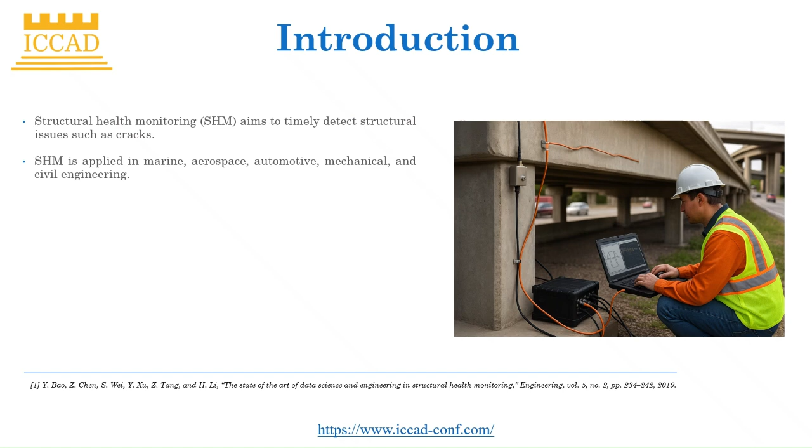We will start with the introduction. Structural health monitoring aims to timely detect structural issues such as cracks. It is applied in marine, aerospace, automotive, mechanical, and civil engineering.

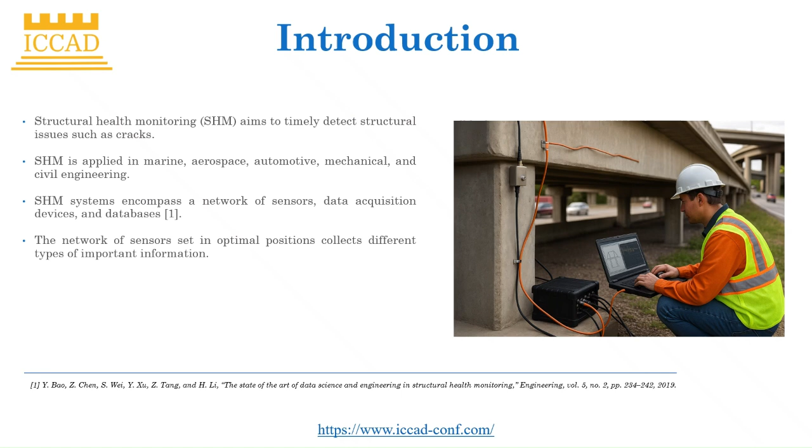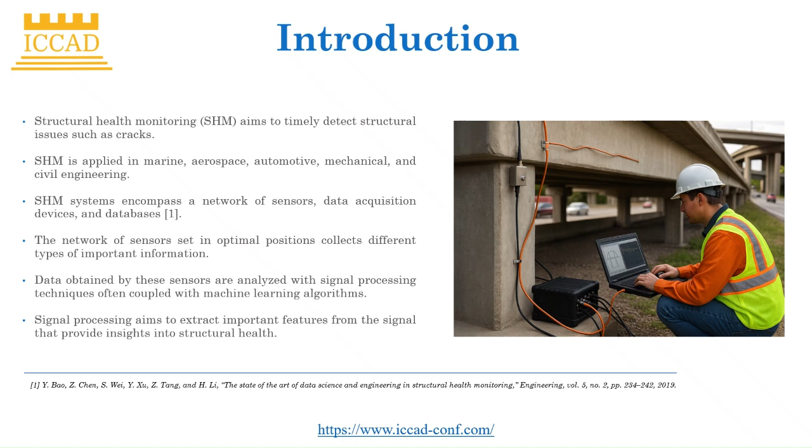Structural health monitoring systems encompass a network of sensors, data acquisition devices, and databases. The network of sensors is set in optimal positions to collect different types of important information. Data obtained by these sensors are analyzed with signal processing techniques, often coupled with machine learning algorithms. Signal processing aims to extract important features from the signals that provide insights into structural health.

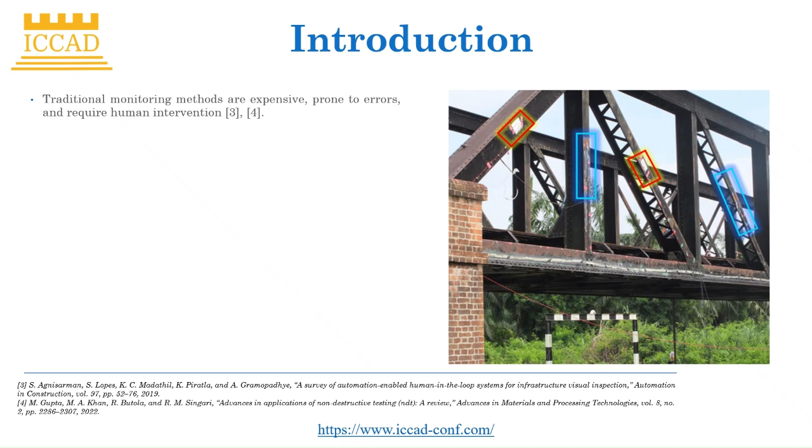Traditional monitoring methods are expensive, prone to errors, and require human intervention. The development of sensing technologies has led to the use of advanced distributed sensor networks for automated monitoring.

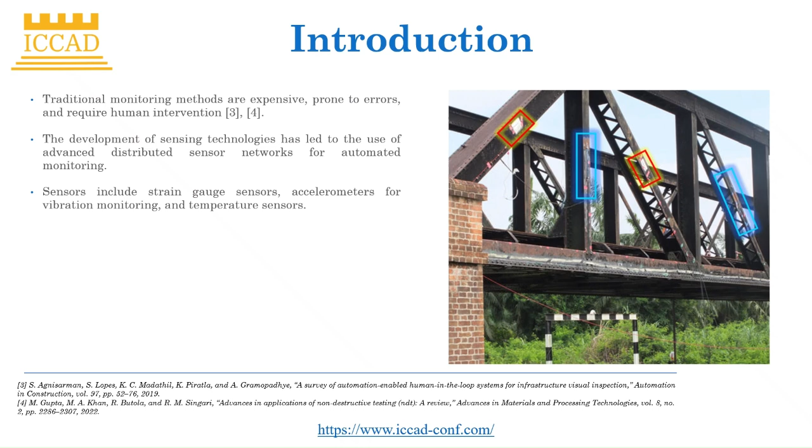Sensors include strain gauge sensors, accelerometers for vibration monitoring, and temperature sensors. These sensors track structural responses to external loads, environmental conditions, and operational factors.

Real-time data analytics relying on signal processing and machine learning allows optimal predictive maintenance strategies. The efficiency of sensing and processing has improved with the development of wireless sensor networks and IoT platforms.

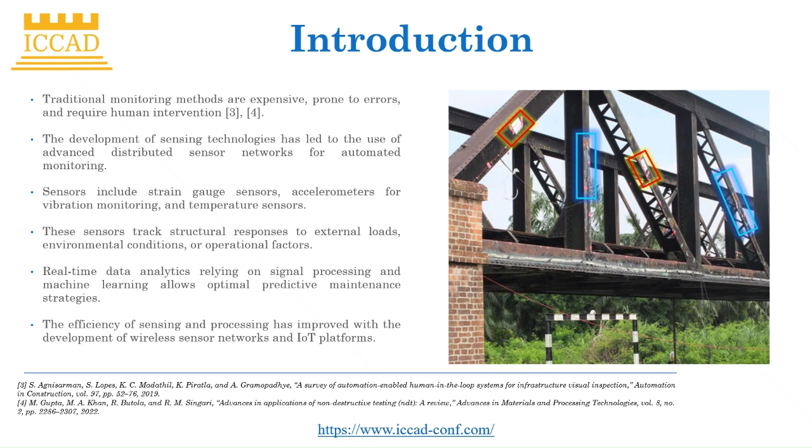Crack detection is vital in marine engineering to ensure the safety and durability of ship structures. The hull must remain watertight to protect cargo, machinery, and accommodation areas.

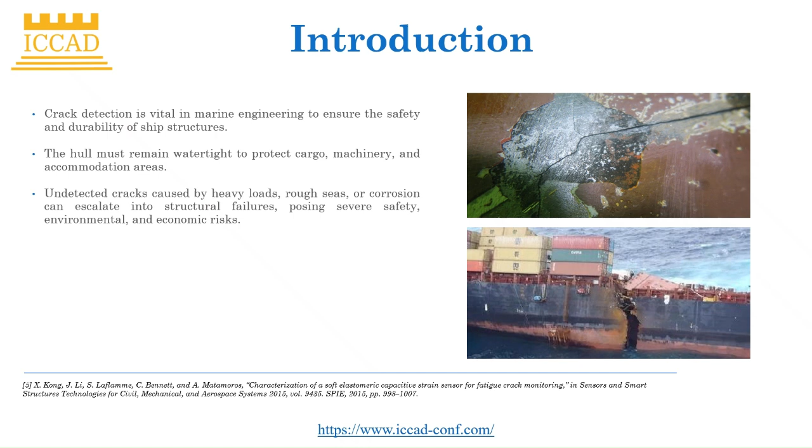Undetected cracks caused by heavy loads, rough seas, or corrosion can escalate into structural failures, posing severe safety, environmental, and economic risks.

Advanced structural health monitoring techniques enable early detection of defects, preventing catastrophic accidents, extending vessel lifespan, reducing maintenance costs, and enhancing overall safety for cargo and crew.

Strain sensors are suitable for monitoring cracks by deploying it over fatigue-prone areas to detect abrupt strain changes due to cracking.

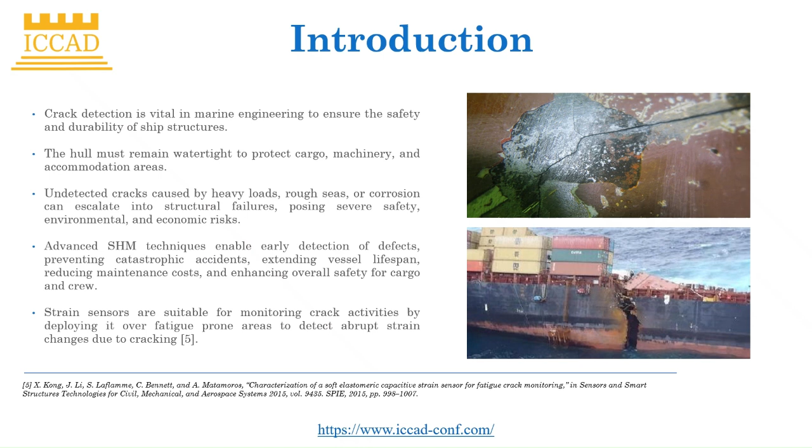Examples of sensors used are accelerometers, strain sensors, ultrasonic sensors, acoustic emission sensors, linear voltage differential transducers, fiber optic sensors, load cells, corrosion sensors, and visual inspection devices.

Sensors are connected to form a network to give a holistic view of structural health. Information collected include acceleration, strain, velocity, and displacement. The aim is to detect and locate damage, such as cracks.

Structural health monitoring techniques are categorized into local, limited to the sensor's area, and global, capable of detecting damage through the structure via sensor networks.

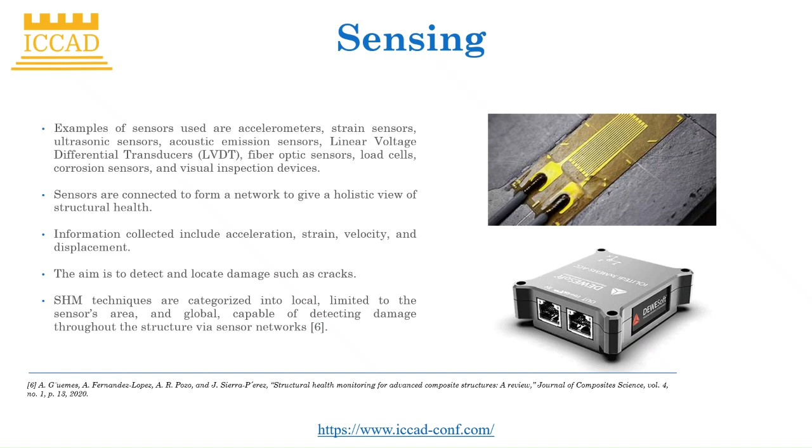Types of recorded parameters include load parameters. They delve into the forces acting upon the structure, encompassing static and dynamic forces such as wind speeds and loads. Global load response delineates the structure's reaction to a given load, measurable across the entire structure, typically encompassing parameters like acceleration and velocity.

Local load response focuses on a specific part of the structure, measuring parameters such as strain, cracks, and tension forces in response to a given load.

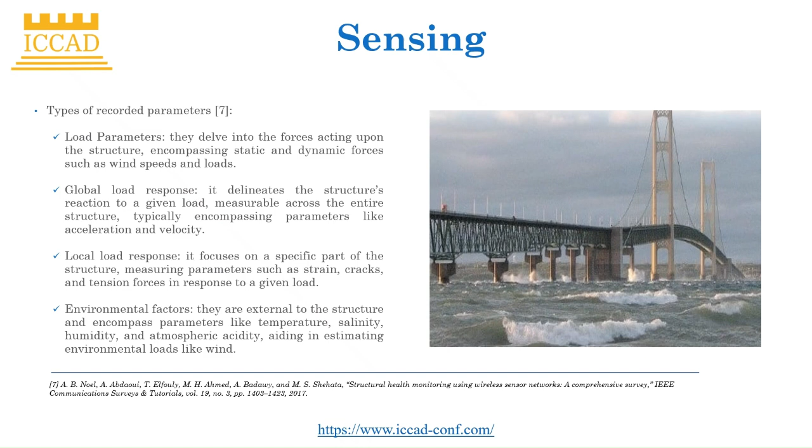Environmental factors are external to the structure and encompass parameters like temperature, salinity, humidity, and atmospheric acidity, aiding in estimating environmental loads like wind.

Sensing data must be collected over a sufficient period at an appropriate sampling rate. The strategic positioning of sensors at various locations is important to capture the structural response. To optimize the placement of sensors in a network, engineering requirements and design considerations must be both balanced.

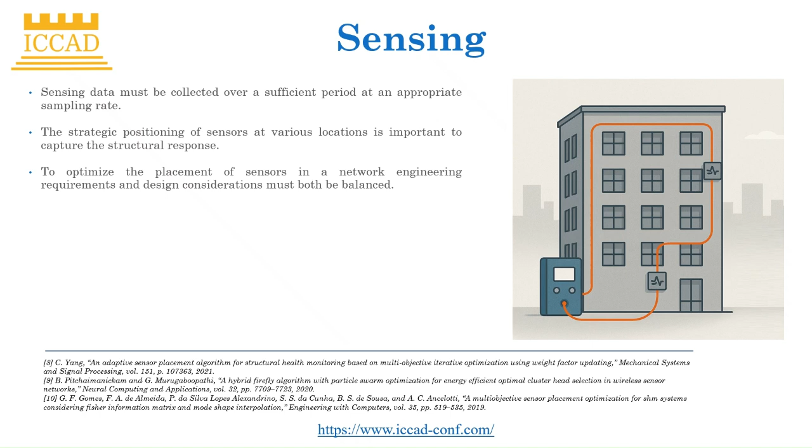Sensors placement problem is complex, requiring heuristics and optimization algorithms. Algorithms aiming to solve this problem include effective independence method, hybrid Firefly, and genetic algorithms.

An important sensor in a structural health monitoring system is the accelerometer. It provides real-time data detecting vibration and movement, aiding in the identification of cracks, shifts, and other stress-related damages.

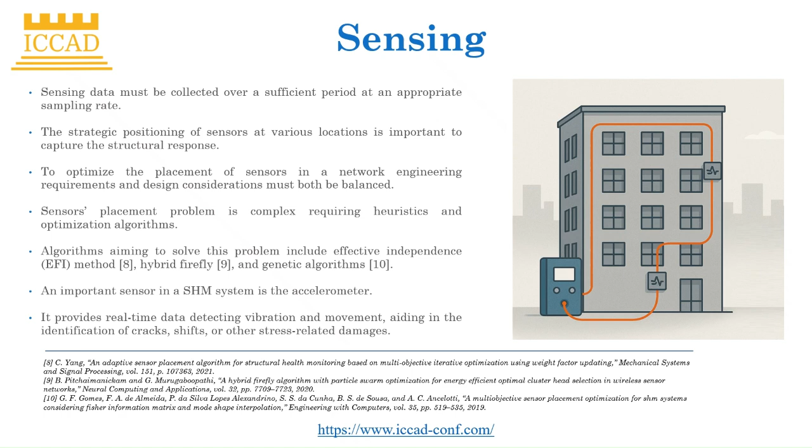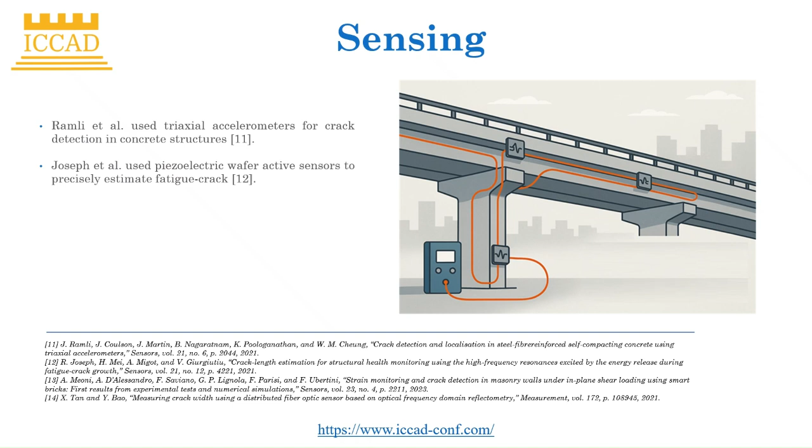There are a lot of examples regarding sensing and structural health monitoring. Ramli et al. used triaxial accelerometers for crack detection in concrete structures. Joseph et al. used piezoelectric wafer active sensors to precisely estimate fatigue crack.

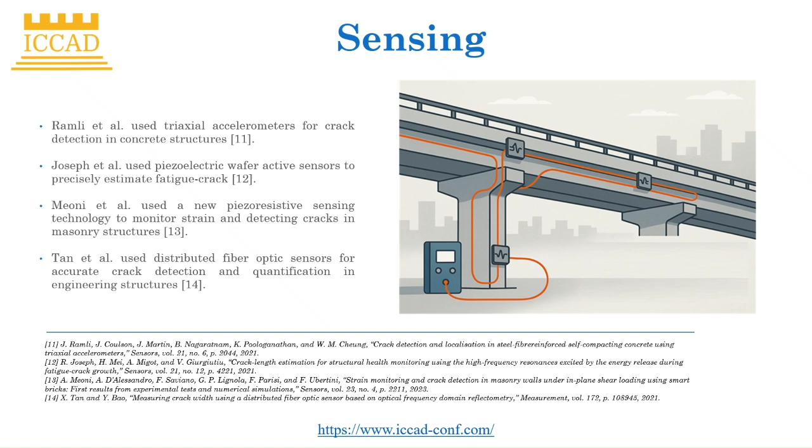Meoni et al. used a new piezoresistive sensing technology to monitor strain and detecting cracks in masonry structures. Tan et al. used distributed fiber optic sensors for accurate crack detection and quantification in engineering structures.

Time-based signal processing techniques: signals collected are used to create mathematical models and extract structural dynamics. Time series analysis is extensively used for extracting features from time domain data, where parameters or residuals of autoregressive models serve as frequent indicators of structural damage.

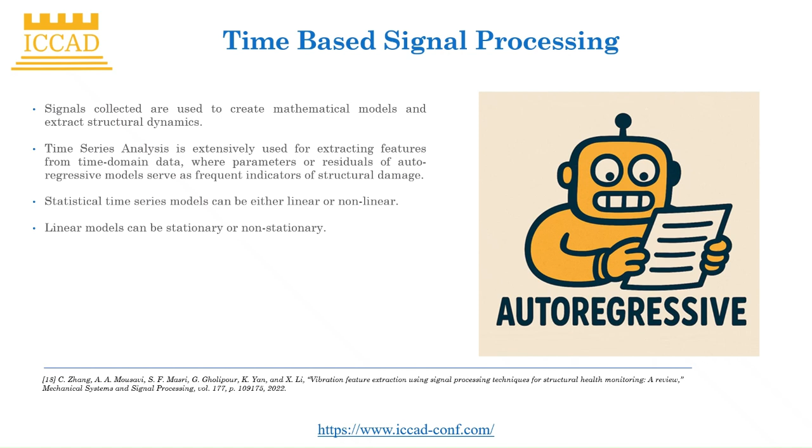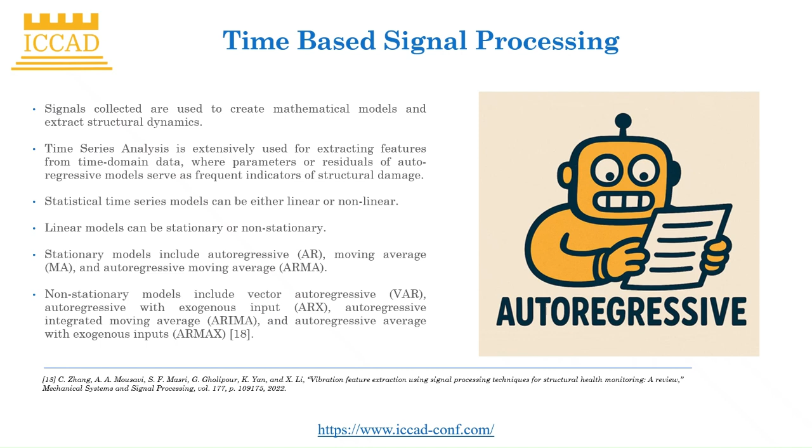Statistical time series models can be either linear or nonlinear. Linear models can be stationary or non-stationary. Stationary models include autoregressive, moving average, and autoregressive moving average. Non-stationary models include vector autoregressive, autoregressive with exogenous input, autoregressive integrated moving average, and autoregressive average with exogenous input.

Some examples: Chegeni et al. developed a method for structural damage detection using Kullback similarity and improved autoregressive modeling, focusing on identifying damage location and severity through vibration data analysis.

Rajeev et al. introduced a novel approach for detecting damage in reinforced beam column joints using adaptive autoregressive modeling.

Anastasia et al. developed an approach using autoregressive modeling to continuously extract damage-sensitive features from strain data collected on railway bridges.

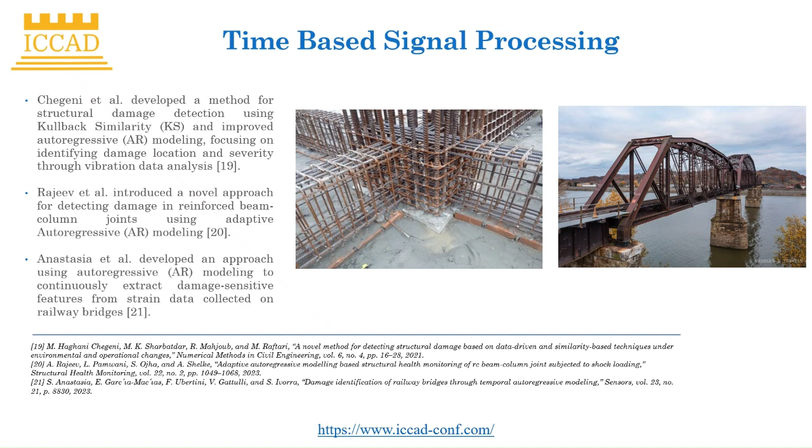Guo et al. utilized vector autoregressive modeling and Bayesian inference to detect structural damage in bridges from ambient vibration data.

Lakshmi et al. introduced a decentralized damage diagnostic technique for high-rise buildings, utilizing the vector autoregressive with exogenous input model.

Yu et al. proposed a substructural approach for damage identification in complex structures, introducing a substructural autoregressive moving average with exogenous input model.

Discuss frequency-based signal processing techniques. Frequency plays a significant role in structural dynamics. Structural characteristics such as stiffness and damping are frequency dependent. Damage in a structure, such as cracks, can alter its dynamic behavior.

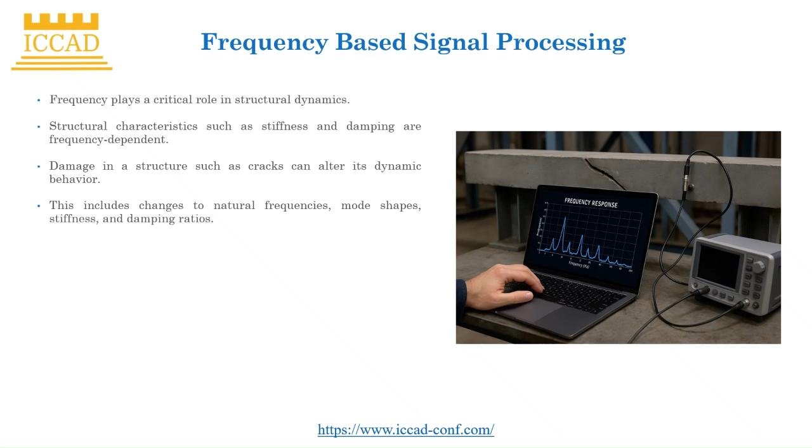This includes changes to natural frequency, mode shapes, stiffness, and damping ratios. To detect and analyze these changes, various frequency-based signal processing methods are employed. Commonly used techniques include spectral analysis, discrete Fourier transform, frequency response function, strain frequency response function, frequency domain decomposition, and multiple signal classification. These methods enable the identification of structural damage and the assessment of dynamic responses in monitored structures.

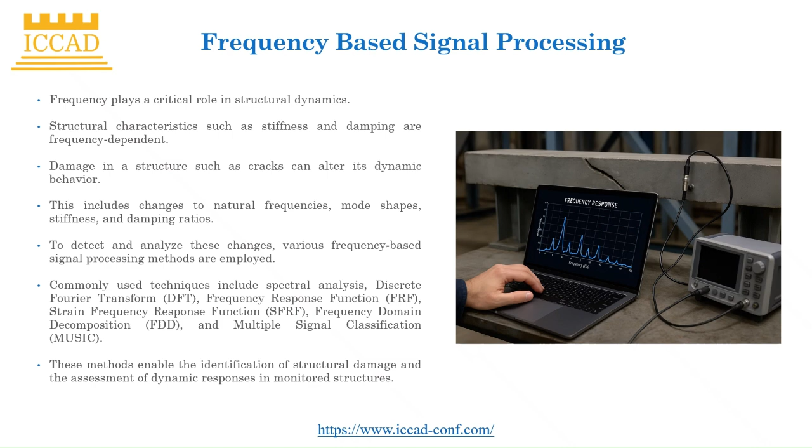Some examples: a method based on cyclic spectral analysis and spectral correlation was introduced by Prawin et al. for detecting, localizing, and characterizing fatigue breathing cracks in engineering structures.

A wavelet-based damage index was developed by Zhu et al. to locate and estimate the crack depth precisely in functionally graded material beams.

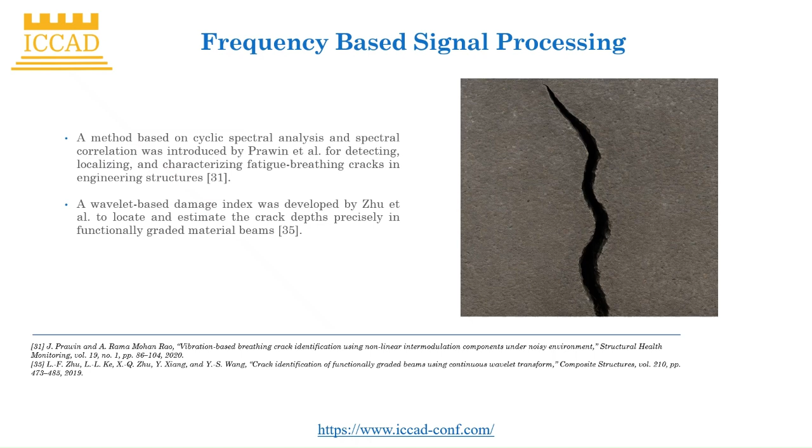Pu et al. introduced an optimization-based damage quantification using FRF to explore the usage of this damage detection approach in an experimental reinforced concrete beam model.

Perez-Ramirez et al. proposed a MUSIC-based technique for detecting and localizing damages in a truss structure under various dynamic excitations.

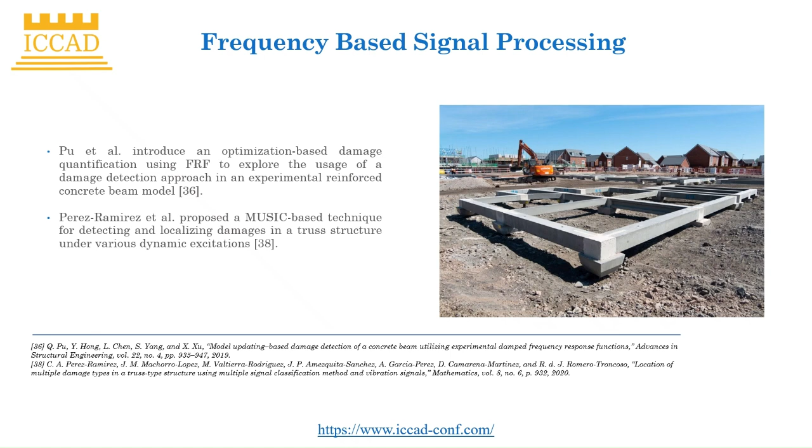Now we will discuss the case study of the paper. Long-base strain gauges are used to measure strain over an extended length of an object's surface, offering a detailed understanding of strain distribution. A sensing network of 18 sensors is placed in different locations of a ship's structure.

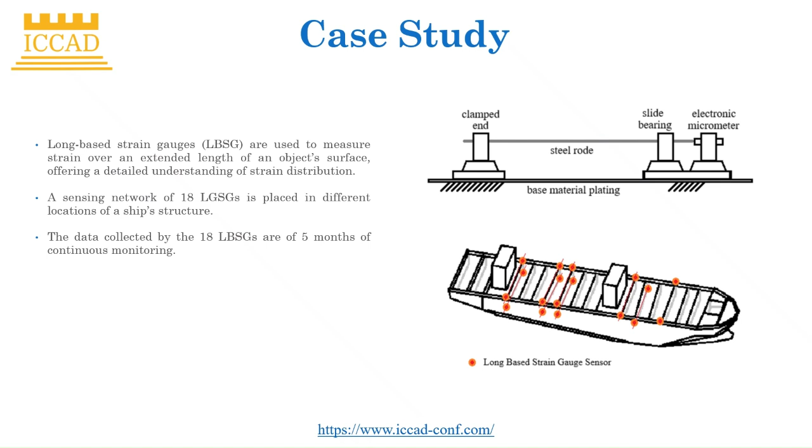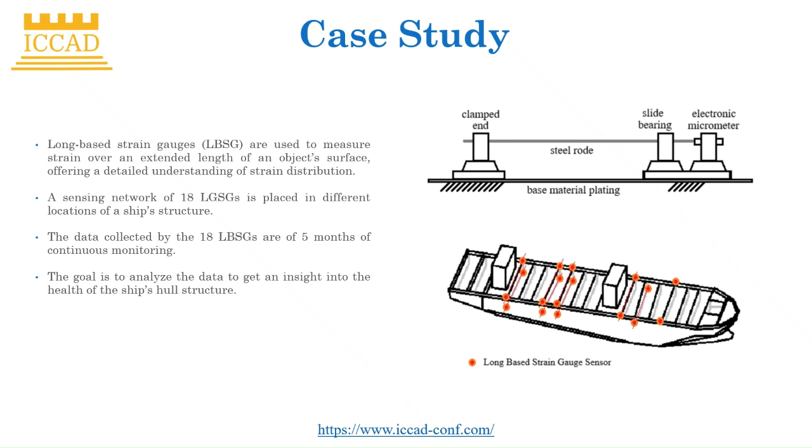The data collected by the 18 sensors covers 5 months of continuous monitoring. The goal is to analyze the data to get an insight into the health of the ship's hull structure. The aim is to track the strain during the period of study to detect the existence of a crack.

The proposed method is as follows: divide the strain signal epsilon of t into equally timed signals epsilon I of t. For each of the formed signals epsilon I of t, compute the power spectral density. Deduce the peak values, peak epsilon of I. Continuously monitor the peak values. If the peak values are greater than a threshold E max, then a crack exists.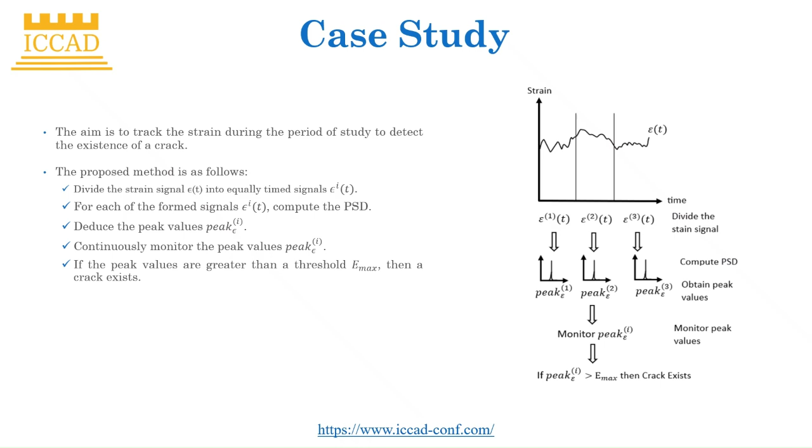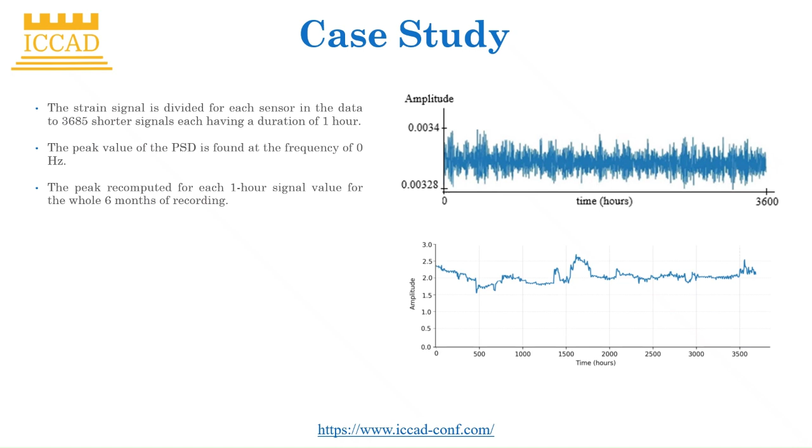The strain signal is divided for each sensor in the data into 3,685 shorter signals, each having a duration of 1 hour. The peak value of the power spectral density is found at a frequency of 0 Hz. The peak is recomputed for each 1 hour signal value for the whole 6 months of recording.

Results show no significant increase in the peak values for all the sensors. This implies that there is no obvious occurrence of cracks during the period of study. However, to evaluate the algorithm, it is needed to have data with and without cracks, and to compare the outcomes in each case.

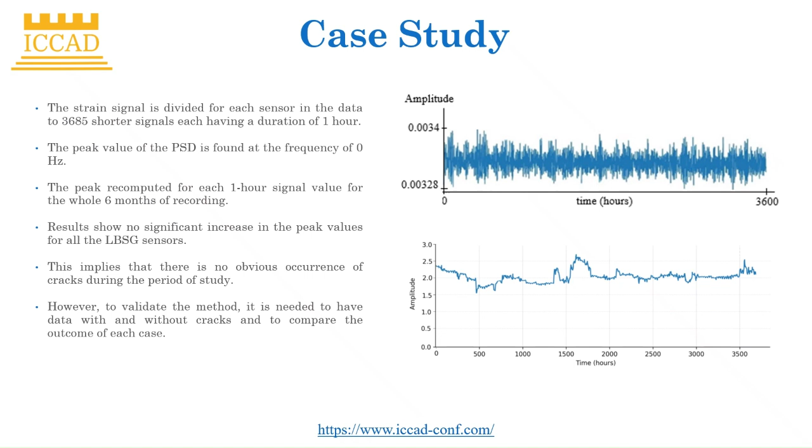Conclusion: effective sensing and proper sensor placement are essential for the quality of the collected data to detect defects. Sensor technologies include strain gauges, accelerometers, and fiber optic sensors. Signal processing plays a fundamental role in extracting meaningful features from sensor data, including time domain and frequency domain methods.

A case study of fatigue crack detection in ship's hull was presented. Long-base strain gauge sensors were used to monitor structural integrity over an extended period, and a methodology based on power spectral density analysis was applied to detect potential cracks. The results demonstrated the absence of detectable cracks.

Further validation is required by analyzing datasets containing both cracked and non-cracked conditions. Further work may incorporate advanced machine learning techniques to enhance detection accuracy and improve early fault prediction in marine structures.